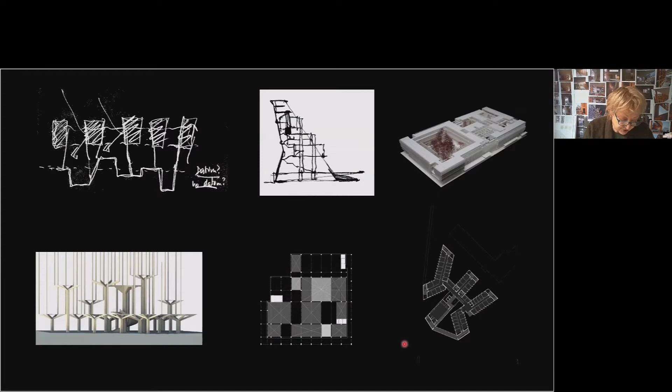I start with the bowl, a functioning object held by the ceramic that provides the enclosure. It is the space that holds the liquid, and it reminds us of architecture and what the Spanish architect Alejandro de la Sota says — that architects should make as much nothing as possible. For us, it's in the nothing that we humans stand, and it is by chosen materials that space is enclosed.

This bowl — I'd like to talk for a minute about the Japanese art of kintsugi, which is the art of repairing broken pottery, by mending the areas of breakage with a lacquer mixed with powdered gold. As a philosophy, it treats breakage and repair as part of the history of the object, rather than something to disguise or hide or pretend that it didn't happen.

I use this metaphor with you this morning. It's really about how architecture adds to the layer of building on this earth. How at a time of climate change, a time to care deeply about our world, we repair the broken, we reuse where possible, we become hyper-conscious of how we use materials — that everything matters.

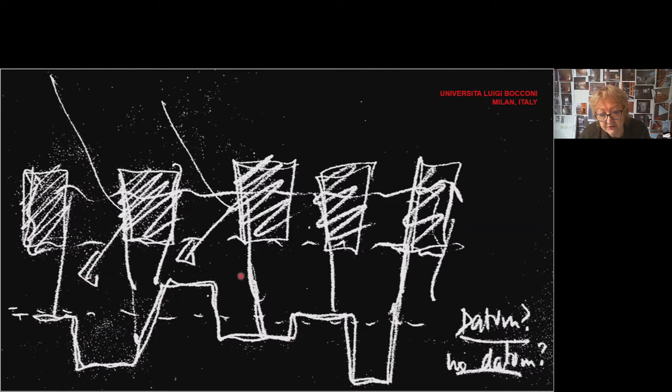We asked the question whether we could corrupt the ground and bring natural daylight down even into the lower spaces, and then between, to make this de la Sota's nothing — that the space between would become the shared space.

So if you look at the section here, this is a human being on the level of the city. There's an 8-meter high glazed screen which allows a view down into this space, and overhanging 22 meters of cantilever is the Aula Magna, which holds 400 people and 600 people. So this is a room for 1,000 people.

But the value of natural daylight for the pleasure of humans in these courtyards - these are like periscopes bringing light down, in this courtyard bringing light down, in this courtyard bringing light down. On this drawing, you see the liquid possibilities of daylight into this interior space. So you get the 3 periscopes of light bringing light onto the stage and into this room.

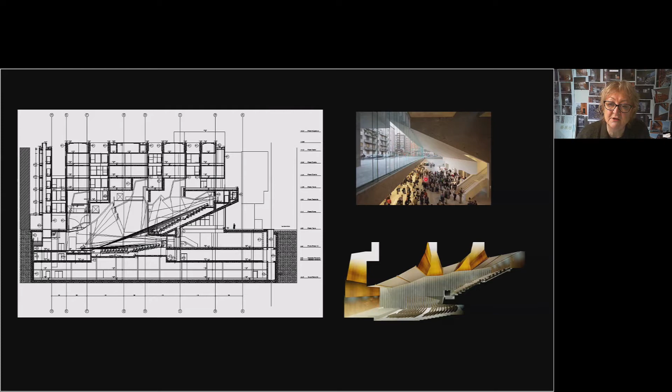In terms of the social relationship, this 22-meter cantilever hovers above, underneath and 5 meters below the city level, lined with Bianco Lasa, a beautiful white marble, creating a socializing space. So two things happen: the university has a space for its own use, but also the citizens of the city are able to participate through this enormous window. So the city is connected to the university, and the university is connected to the city.

Another project that we did in Lima, Peru, was a wonderful experience for us. Lima is a desert city, on the Pacific Ocean, with 40-meter high cliffs which separate the city from the ocean.

Because it's 12 degrees from the equator, it should be a really hot city. But because of the Humboldt current, which comes up from Antarctica, it cools the city. This generates fog, and the fog is amazing because in this position on the Earth, it refracts the light and actually affects the back of your eyes. It's an amazing experience to be in the fog of Lima.

For this project there was an international competition. So, under the title of this morning's Physics of Culture, we looked at this place for its unique characteristics.

In our research, knowing only slightly about von Humboldt, we dug deeper into this incredible human being, and we absolutely love...

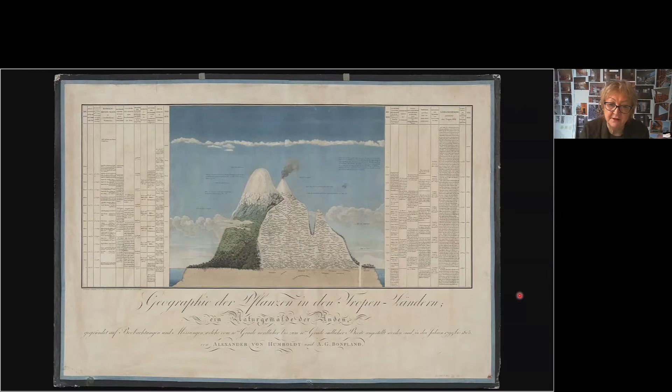What we loved about discovering von Humboldt was that he was synthesizing all the information of position on the Earth, depth, section, the integration of atmospheric pressure and planting. What is amazing about this drawing is that rather than the science being separate, it was really looking at nature in a very complex way and finding a simple way of presenting that complex knowledge to the general public. He's the man that, for us, was a wonderful find in terms of research.

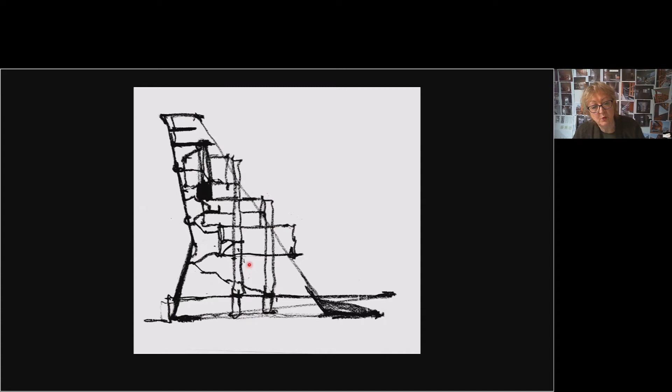So this leaning back was a structural response to the very seismic nature of this city. And because the sun is 12 degrees from the equator, the sun is very harsh, so we were making this like a peak cap to protect the students within what we called a vertical campus. We asked the question, could a university be a man-made cliff?

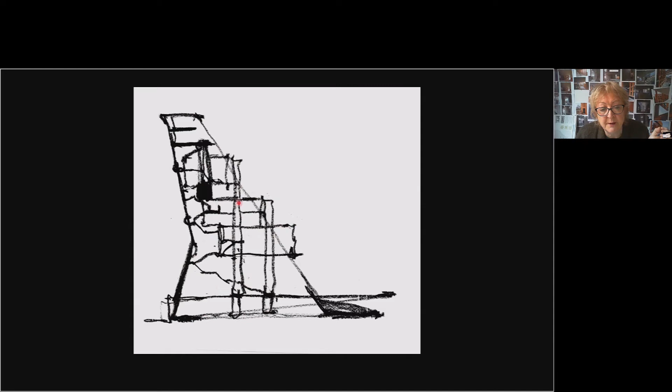We were inventing stories for this new university to find expression for the university, but also an educational idea. So if you were a student from the Andes walking on these circulation systems, you could see into these large laboratories, into the other laboratories, and maybe if you're studying one subject, you might become intrigued by other issues dealt with in the education system.

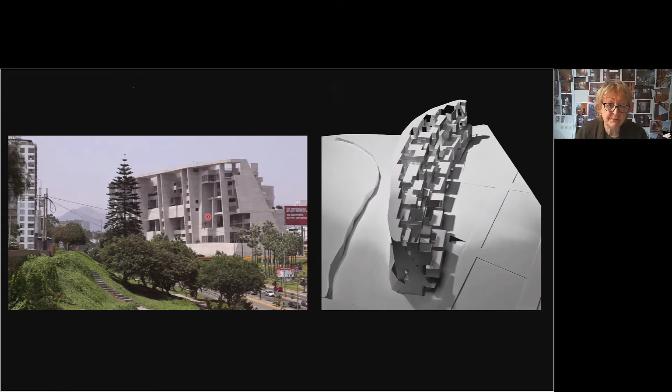Here is the building in its context, with the sun protection, and the evacuation staircases positioned every 20 meters, and the routes through where students are aware they are close to the foothills of the Andes and looking out to the Pacific, but also that they had this vertical campus, which was their new world.

Architecturally, the site was like a boomerang, a long, thin, 360-meter long site. Every 20 meters we placed these safety staircases, but also places where students would meet each other. Like an abacus, we placed the various rooms and modified each position at these junctions because of the shape.

What is really interesting is that because of the shape, the feeling of walking through this space is like going through a medieval city, because it's not a line, it's shifting in terms of structure. Every 20 meters we had these diaphragm walls which picked up the various functions. You can see them as you go through.

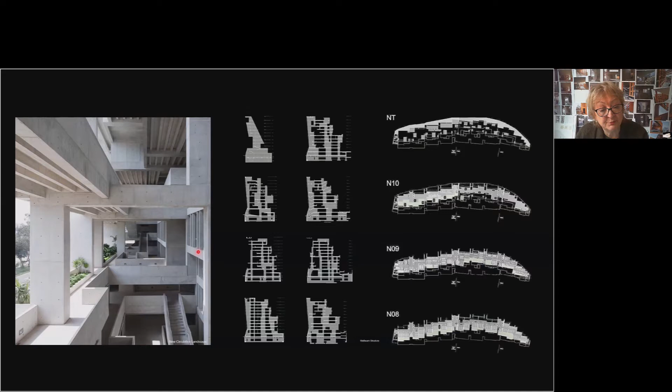We also had intertwined gardens, so we brought nature into this carved mountain, and we had the major circulation, but also minor circulation. It's a bit like an Escher drawing that you move through both in this direction and in this direction. And as you're moving, you see into these laboratories. So it was an educational expression for UTEC, this new university, on the busy motorways of the city.

Another project which we have just finished outside Paris in a place called Saclay - it's a strategy by the French government to move many universities out to this area on a plateau called Saclay.

For us, we deal with many situations which are embedded in existing city structures. One of the difficulties or challenges for us as architects, when you're building on new ground, on open ground, is to find something that anchors our thinking to place.

So on the left-hand side is a little piece of stone. When we went to this site, it was a field, about half an hour's taxi journey from Paris, and we were trying to find something to anchor our thoughts in this place that would take some time to become a whole educational precinct. So this is a beautiful stone from that site.

And on the right-hand side is a piece of work by the Spanish sculptor Chillida. What we love about this is that Chillida has this incredible ability to make pieces from which it seems that light emanates - it seems that light is in the interior and moves from the inside out of his work.

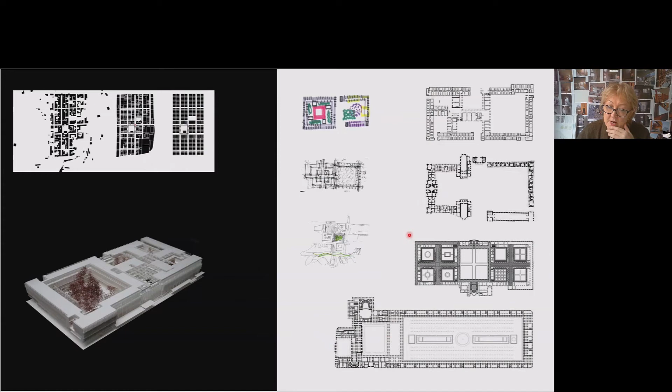The reason I'm sharing these with you this morning is that as architects, we're trying to find the measure to make a judgment about how to make a new organization.

With the Saclay project, we were building, as I said, out in an area which was completely new. Part of this project was that they wanted 100 real trees as part of the organization, and they wanted to keep a 1.36 grid.

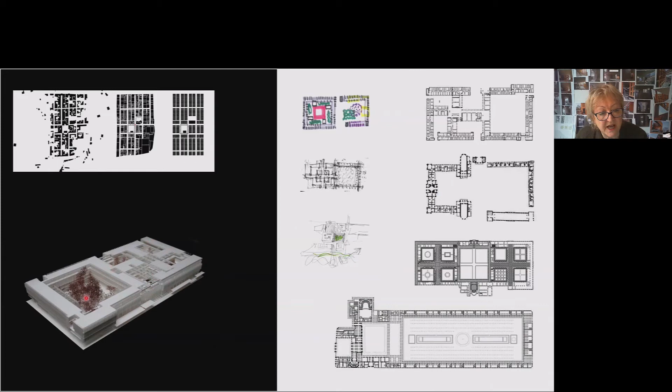So what we've done is a series of vertical contours that link with the rest of the new campus and formed a series of courtyards: an entrance courtyard, three others, and a main courtyard with the deep trees.

We've positioned all the shared uses on the lower level: arrival, cafe, student positions, exhibition spaces. Here we have real ground for the real trees, and the main student space arriving up a ramp, with the library in this position to enjoy the relationship to nature.

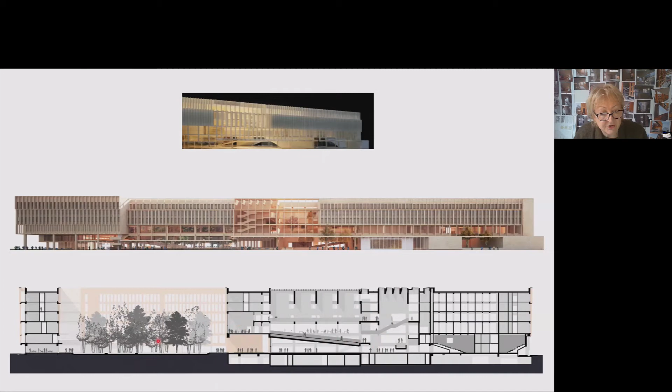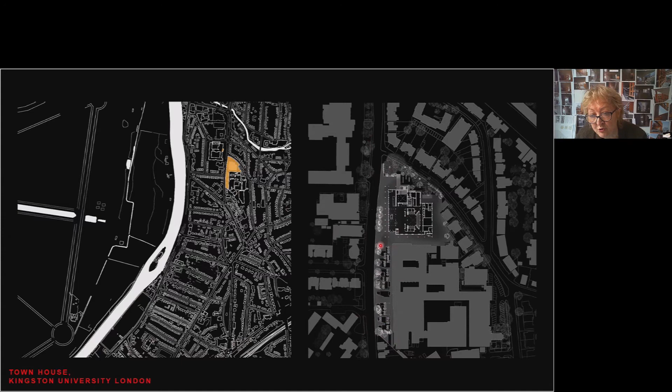On the right-hand side were 1970s buildings of very poor quality with parking outside. We positioned this building here, taking away the parking, making a public space, a new linear park to connect this new university facility with the very busy road and also the local community, keeping existing trees, making a new park, but also bringing people in to a new auditorium.

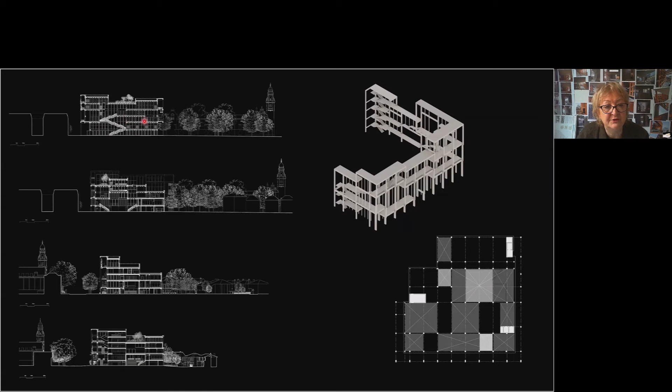I'll quickly describe this in its location, but the main thing for us is that even though we had made plans and sections, in reality the experience of architecture can only be in itself. It's like reading music, you have to be in a space, you have to move through it to really experience the interlocking of light and space.

What we feel is very successful in this new building is that we have made an auditorium shared by everyone. But the incredible thing about this brief was that it was for a library and for urban dance. Urban dance is one of the noisiest disciplines, and a library, as you can imagine, is the other extreme. So this university wanted to place these two extremes in terms of noise and light together.

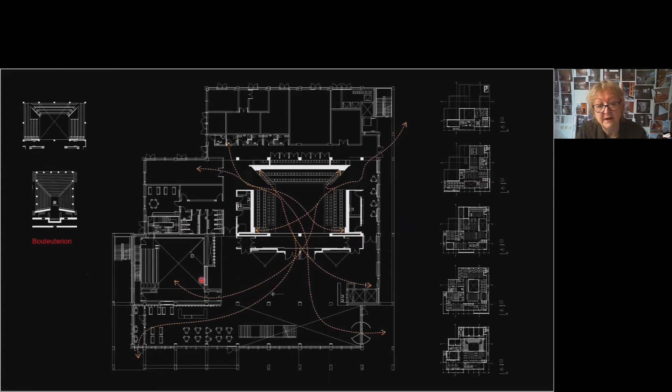Architecturally, we found that, crazy as it might have sounded, by insulating the sound of the dance, making a complex section, and allowing light in to make it a three-dimensional experience, it is working extremely well. So this is the auditorium or the courtyard.

You have the library being able to view into it, participating in the sense of seeing dancers prepare to come into this space. So this is the socializing heart of this building.

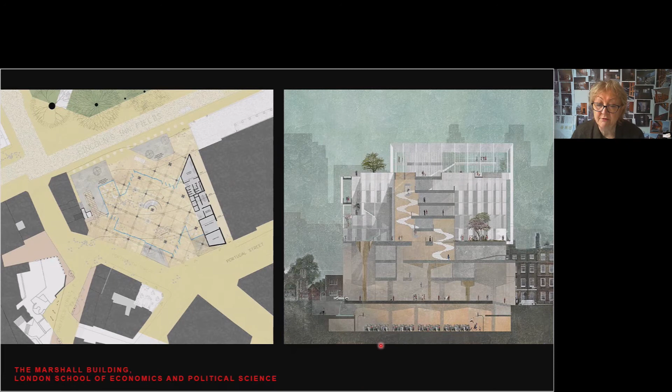Quickly, as I'm aware of time - this is a project we're building in London for the London School of Economics, in section connecting to the city, moving up through the building with the various departments onto the rooftop to view out over the city.

For us, structure is really an important component of architecture, so we have made these enormous trees of structure. We are referring to the beautiful undercroft in Lincoln's Inn Fields, this beautiful chapel which is held above this beautiful structure, which is open.

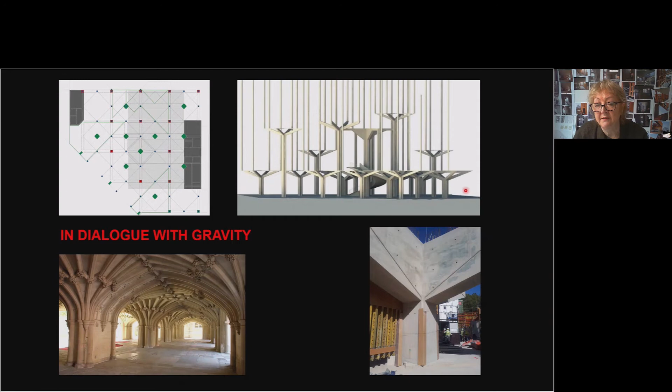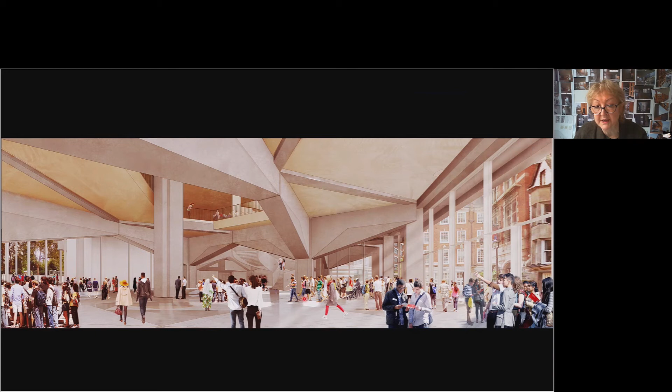Going back to the Venice Biennale, free space is really the space used by the general public. For us, in this new building, which is 55 meters onto Lincoln's Inn Fields, this is the area down below where all the students of the LSE campus will meet. This is the space under construction now, with LSE in the distance, this sloping floor connecting all of the campus of LSE, and this enormous structure of trees.

This is an 8-meter span, so the socializing space means you move up this great staircase to the teaching spaces above. I'll finish with this last project, which is also just finished by us, in this beautiful city of Toulouse.

This is the River Garonne, the Canal du Midi coming into the city. The competition was for a breach in a medieval wall. This is 5 meters high, a new university in the breach of this brick wall, a Romanesque church, absolutely beautiful. What we've made is a sundial.

So these are the study offices for the researchers, but also their gathering spaces for lectures. In terms of the physics of culture, what we wanted to achieve was that when you're in this building, we would frame the wonderful views of this fantastic city.

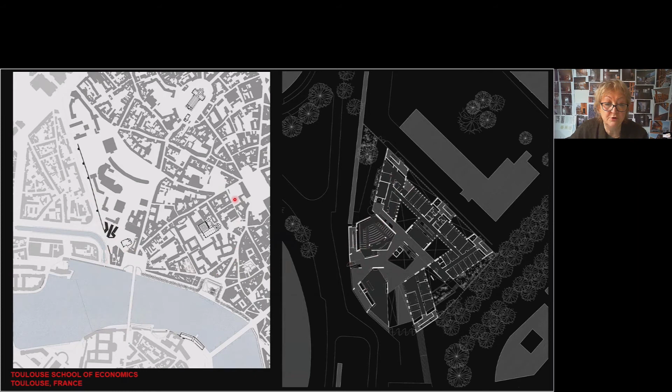Toulouse is a brick city, and instead of using plaquettes, which are tiles, we found within an hour from Toulouse people making beautiful bricks in the same way as the Romans were making them.

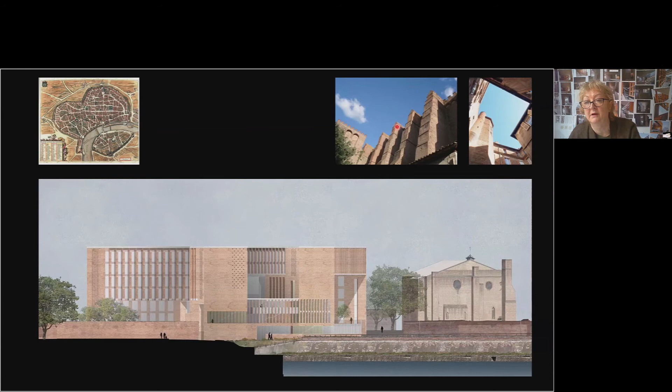So here is our 5-meter high brick wall, our building as a breach, in this beautiful city of cathedrals and walls. Our section, which is about a vertical section here, has what we call a sky cloister.

You move in, you move up through this open space, and the plan becomes like a sunflower. Each of the offices responds to its orientation and protection from the sun.

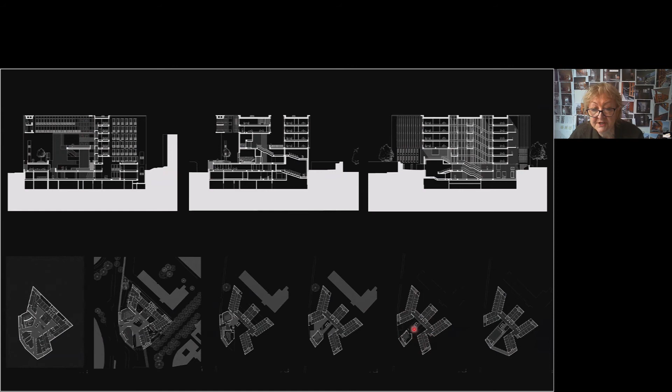When you're inside, your view of the city means you are more aware that you are living in Toulouse, that you are not in any other city in the world, but that the building heightens your awareness of this beautiful city. So this is the canal, the breach in the wall, what we call our sky cloister.

And here you're entering into this building, and from all of these positions, you are aware of the city.

I'd just like, finally, on this last slide, to describe to you that in the Biennale, as was mentioned earlier on, we chose the title Free Space. That was really to deal with space as opposed to object. But we also stated that the earth is client. Two things people can look at for their own enjoyment on YouTube are a little film called Il Capo and another film called Chasing Ice.

The reason for us putting those into the Biennale is that on the left-hand side, we would encourage every architect to realize that when we specify elements and surfaces, we are carving out precious resources from the earth, and that it should not be done lightly. On the right-hand side is a film describing the melting of glaciers in Greenland.

So we, as a profession, in terms of this morning's discussion, are very aware that we play a role in what is chosen as materials and how we make buildings in terms of sustainability. So I'd like to end this morning by saying that the earth is truly our client.